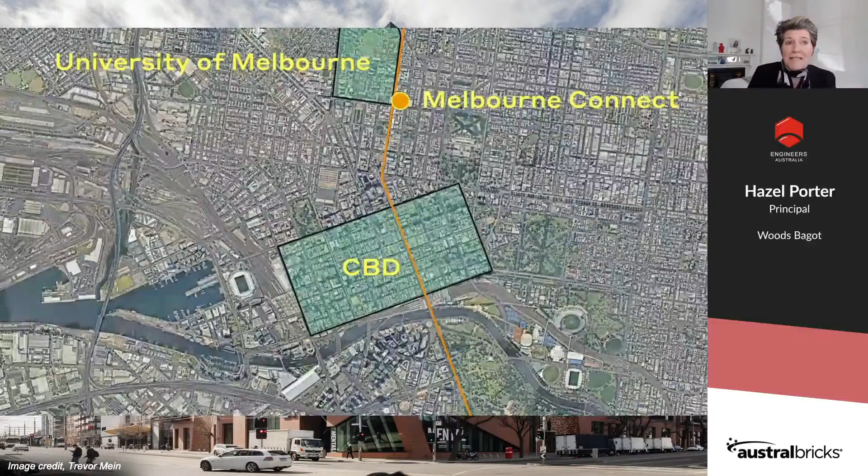To tell you a little about the background and genesis of the idea and how we constructed this place, it's one of the only innovation precincts in the whole of Australia. It sits just off campus, just outside the CBD, near the University of Melbourne, one of a small cluster of buildings sitting in the suburb of Carlton.

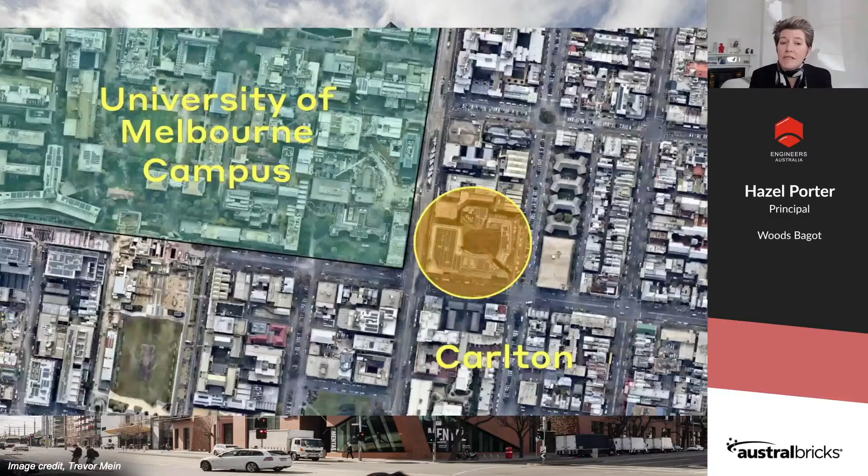As I mentioned, it's just off the traditional campus, and it's a site that's had a pretty robust dialogue with the surrounding context. It had a particular scale that was quite unique in Carlton, and it's a site with an incredibly complex history. Since 1856, it's been a site of ongoing dedication to women's health and innovation in women's health, both in science and wellbeing—a place of continuous learning with a lot of groundbreaking research happening here.

From the outset, the key design principles we set for ourselves included the intent to deliver a really high quality built form that connects key land uses with great amenity. We resolved a built form that reflects the strategic importance of the precinct, with clear, demonstrated innovative precinct-wide ESD initiatives. We also wanted to create an enhanced public realm and open space which all of the program could connect to, taking cues from places like the old quad on campus at the university, so that connection back to the institution as a place of knowledge was still recognisable.

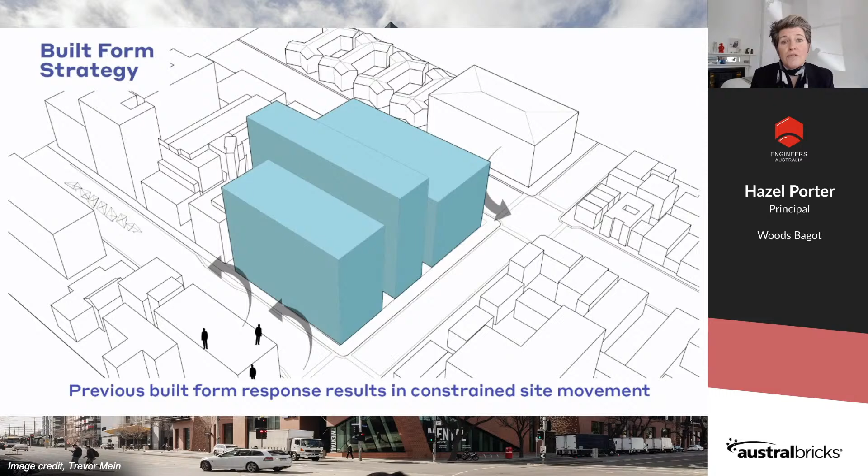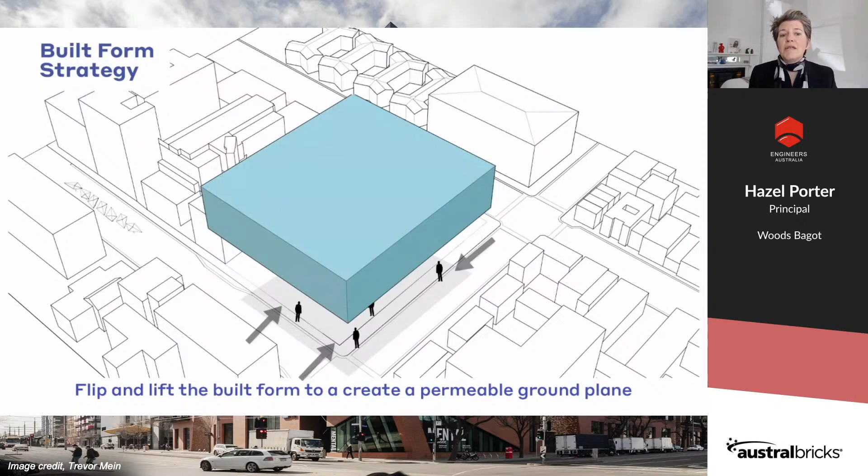When we went through and approached the built form and investigated retaining the existing hospital buildings and adaptively repurposing them, it became pretty clear that this wouldn't facilitate any of the intentions of the brief and the aspirations the university had. So we conceptually flipped the program 90 degrees and lifted it above ground, which allowed the site to be accessible and created a space in the centre of the site—both ceremonial and practical. This approach became the foundation from which we designed a universally accessible ground plane.

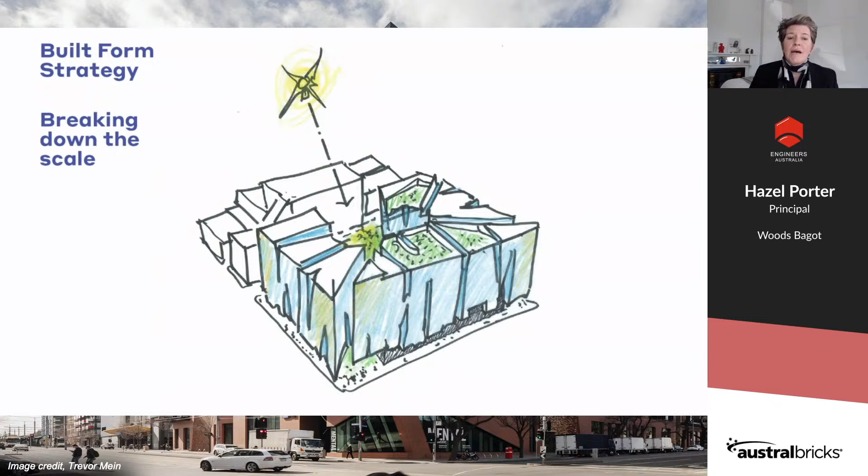We also had around 4 metres of height difference through the site to mitigate, and that allowed us to push the built form and program to the street edges—quite challenging given a whole series of planning setbacks we had to challenge. But we were convinced this was the right approach to create that gathering space within.

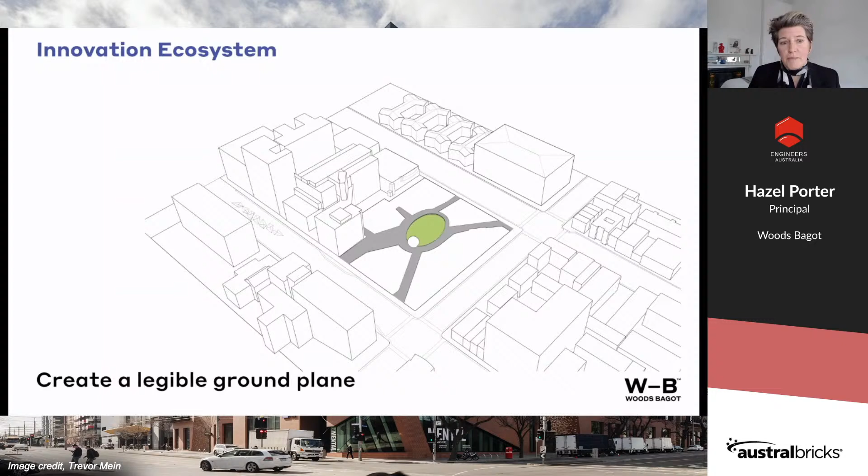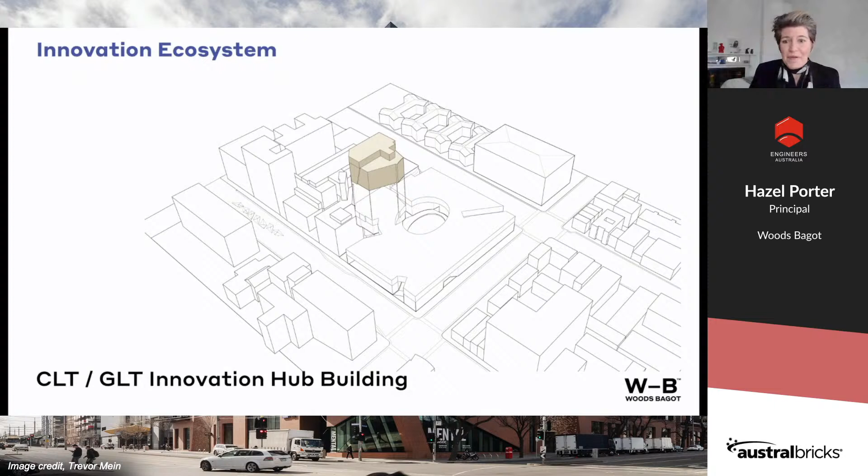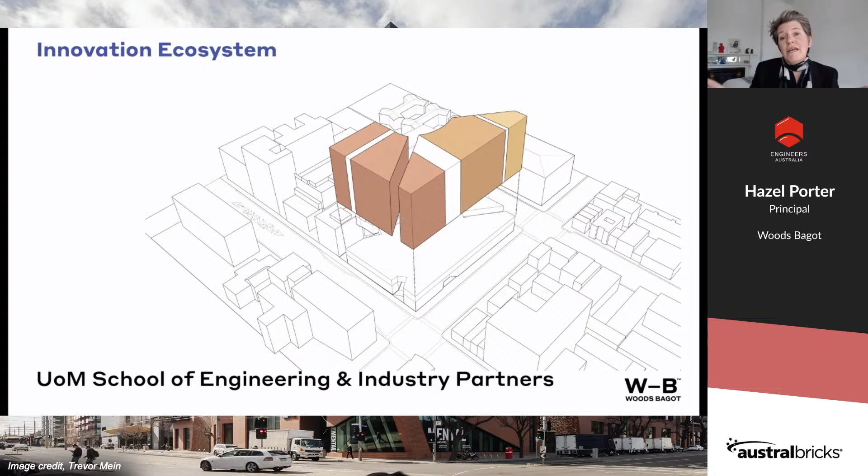When we run through the build-up of the project, the program stack and the way we orchestrated and organised everything around this central open space becomes quite clear. We have the ground plane, and the connected superfloor that hovers above and sets the geometry to organise all of the other buildings. There's the small timber frame building—and I say small, it's not actually that small, it's 6 storeys—with the residential accommodation that Hayball collaborated with us on. We've got the School of Engineering and all of the industry partners within 2 connected wings of the building. Overall, the massing plays out to make this connected ecosystem of innovation.

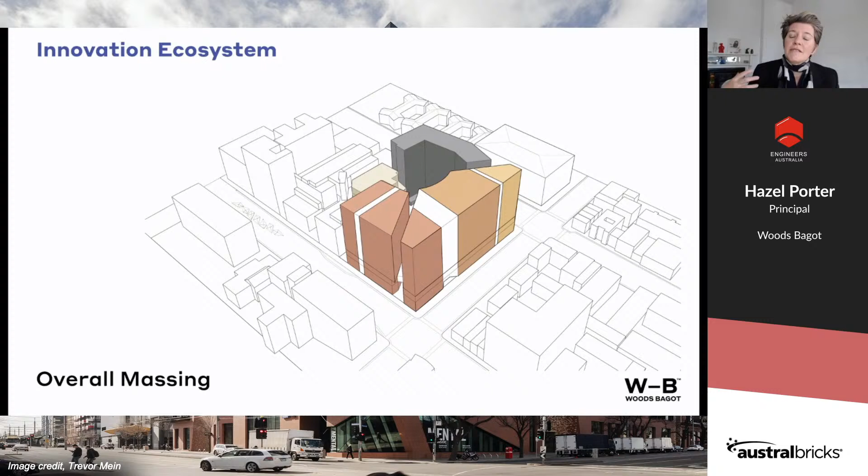The articulation of the massing then became all about how we break that up in the city skyline, while being cognizant that it needed to relate to people at a scale at the street. So as a statement of intent at the gateway of the Parkville campus to the University of Melbourne, the external articulation of the building is deliberately broken down into discernible components, where the space between each piece signifies either an entrance to one of the buildings or a laneway connection through and into the site.

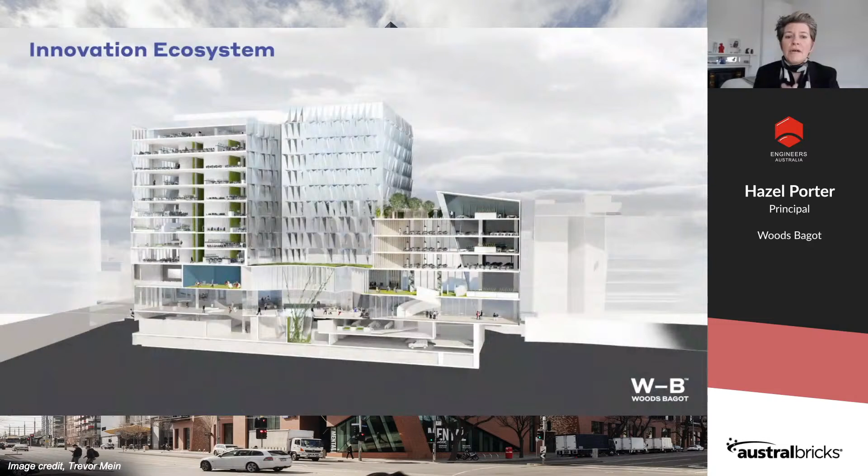When we slice that building open, we can unveil the complexity of program within, and you can start to see the connectivity right through from the lower subterranean levels up through to the inhabited rooftops and green roofs. And when we look at the detail of the ground plan, those connections are even more legible.

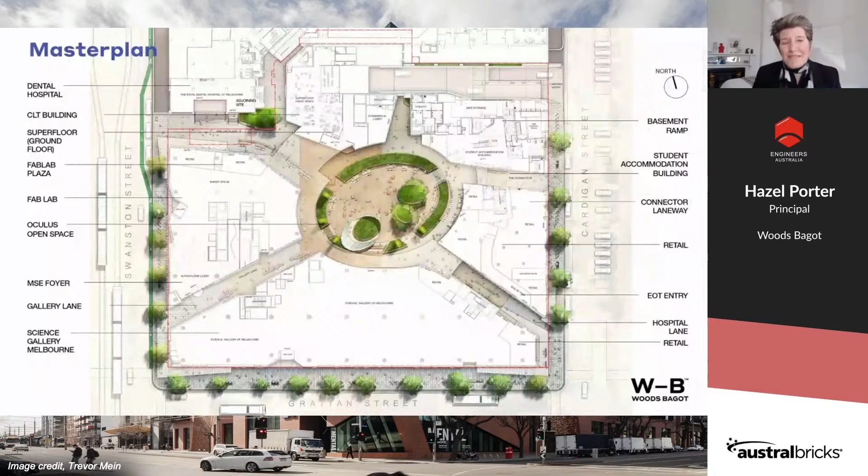The central theme of organising open space is really to bring people together and give them a place that's connected to all the buildings, inherently part of the university and also Carlton. This is a publicly accessible 24/7 area and space, and it is incredibly welcoming.

That's to emulate the conversation around innovation as a collaborative process. With Aspect Studios, we've used timber and bricks in the ground plane and native planting in an effort to create a really robust, inviting place. It's great to work outside with seating, tables, Wi-Fi, and events coming up eventually when we're allowed to be back there in person.

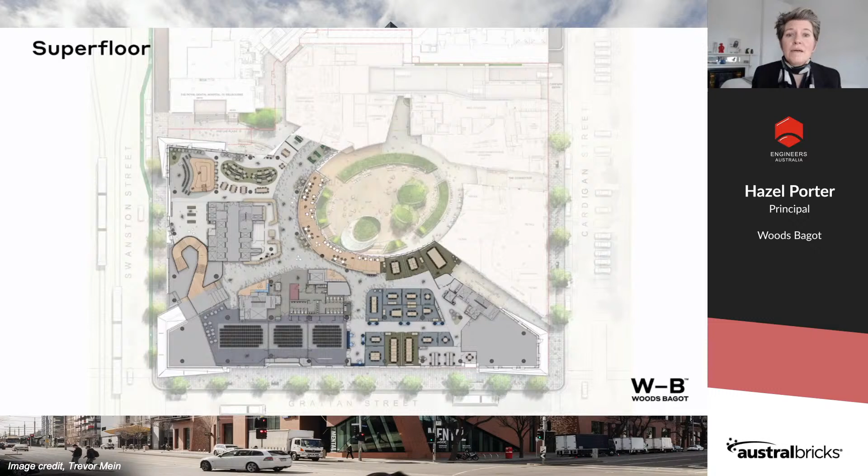So the superfloor is that invited space. It's open to everybody who works in the building and who lives on this particular site. It's a little bit like a hyper library where everything's connected, with a whole series of different types of spaces.

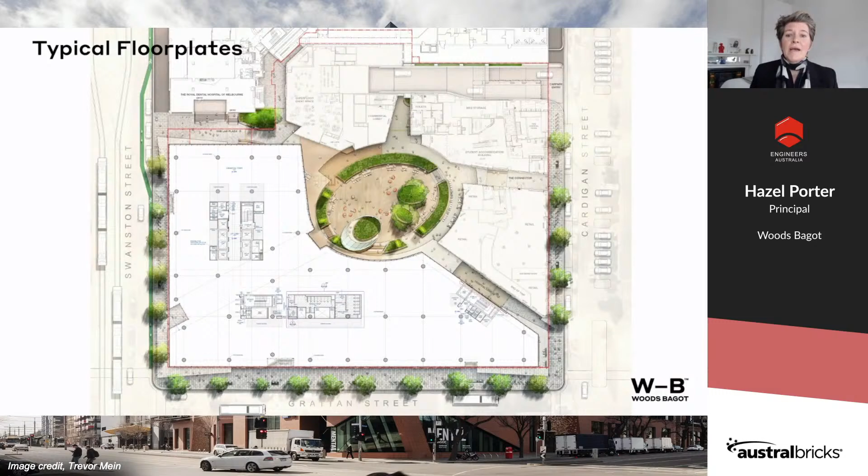Moving up into the typical floor plates, the main building is split into two with two different cores. As you can see, we've got a lot of facade area, so we'll get into what that actually means for tackling that design problem. With that understanding of the context of the university campus and the urban grain of Carlton, we really looked to connect those two conditions, bringing it through the site and quite literally connecting everything.

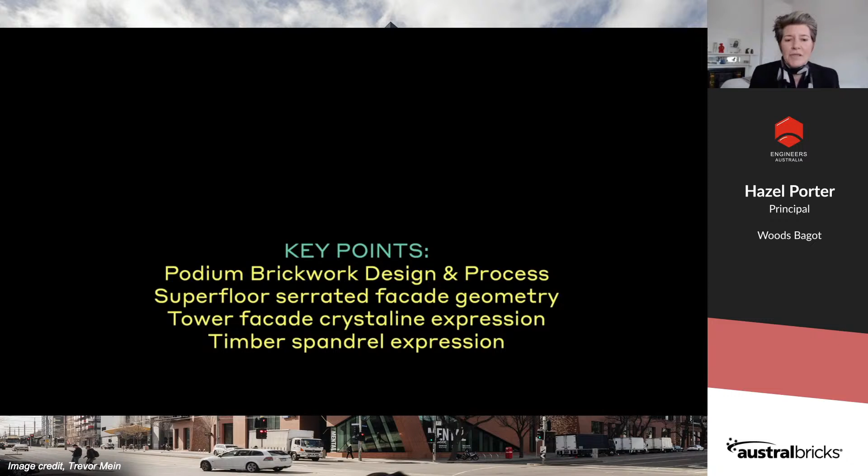When we worked with Arup on the facade types, we had four key areas: the podium, the superfloor serrated facade geometry, which is a really important organising feature of the whole precinct, the facade of the tower, and the timber frame building. The ones I'd like to talk about today are the brickwork and the tower facades.

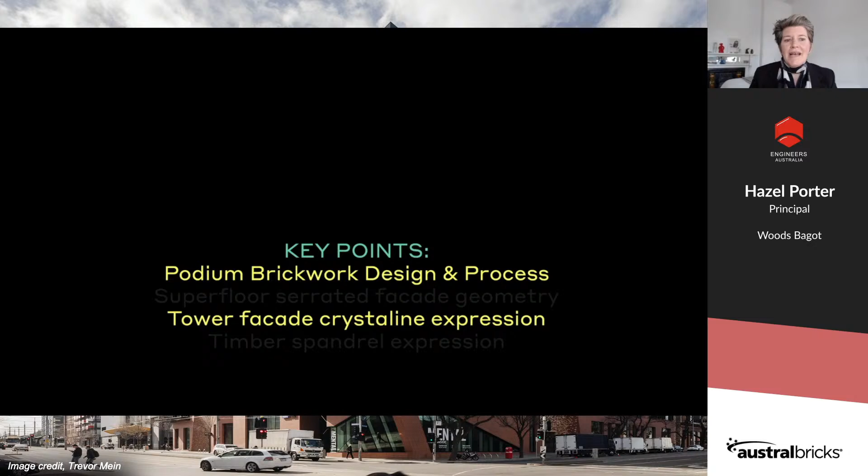Mainly talking about the collaborative nature of spaces, we might ask how we actually reassess what's going on in the public realm at a moment when we're not physically as connected as we'd like to be. What we like to do is talk about how we've approached the design of the facades to, in future, hopefully facilitate as much collaborative work on site as possible.

So we've come full circle, and what we wanted to do was connect what's going on outside to the inside. We've really looked at a whole series of relevant materials in and around Carlton, and one that stands out is the brickwork.

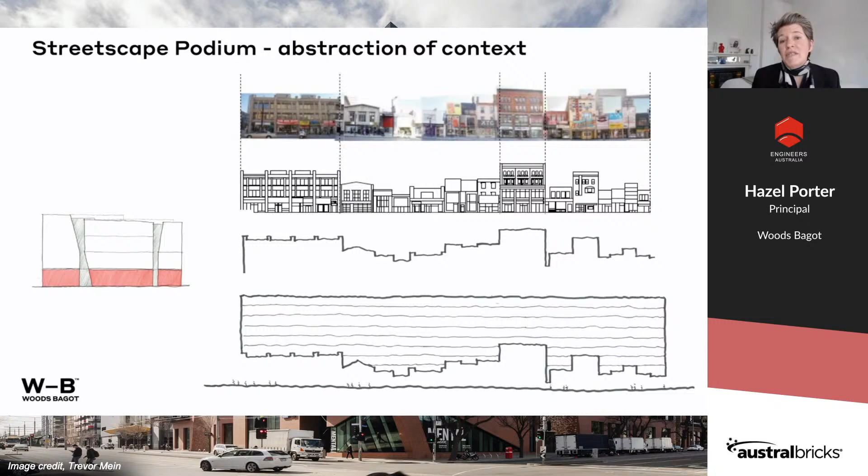In the podium, the materiality and scale that's really predominant in these streetscapes has inspired us. We abstracted that scale and rhythm and created a human connection and scale at the interface, which is then saturated with the minutiae of brick detailing.

When we play that out throughout the buildings and the connected nature of the city block it sits in, we start to carve out the underside of the podium with the silhouette of the street. The ability to pull those two things away is really where we put the superfloor, so that it becomes a connecting feature.

We deliberately aimed to make the street-facing windows of the creator spaces, the science gallery, and the superfloor have slightly more domestic overtones than you might expect in a building of this size. We did that to indicate the spaces are quite familiar and accessible — you can sit there and peek through the windows to see what's happening.

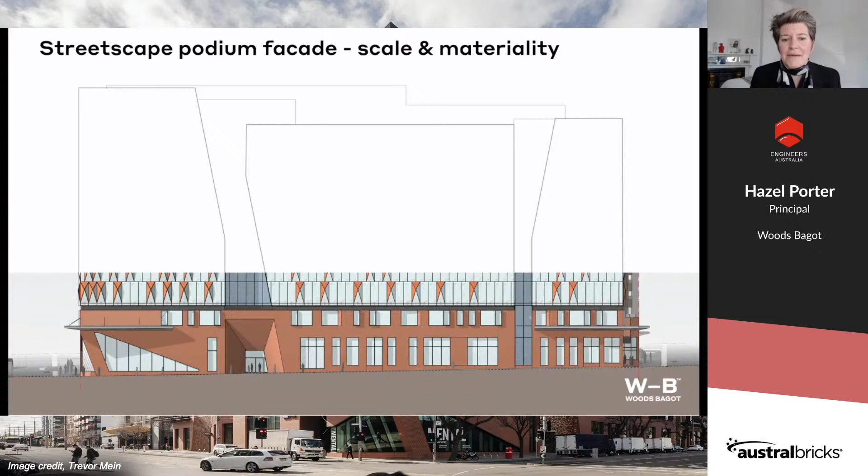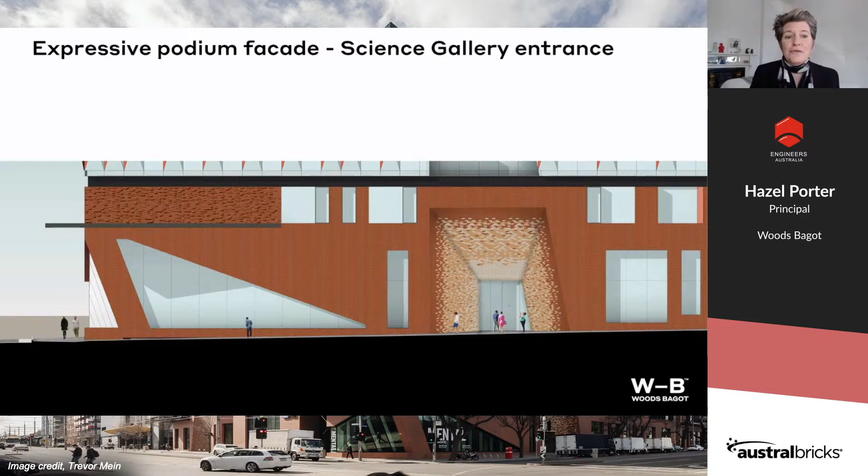Where there's something really going on, like a display in the Science Gallery Western exhibition space, we made the windows really big and gave people spaces to sit and look through to see what's going on. In Swanston Street, we've used the brickwork podium and a massive brick portal to celebrate the entrance to the maker spaces and the fabrication laboratory.

We used a mix of the university grey bricks and the red bricks of Chapel Red, Burwood Blue, and replicated the previous brickwork from the old hospital. With that mix and pixelation, we really looked to play up the idea of entrance, and we get these beautiful unexpected moments of shadow play, really celebrating life on the street.

To unpack how we actually made all of this work — understanding and working with traditional brickwork, we really had to turn it on its head and figure out how to span all of these giant openings.

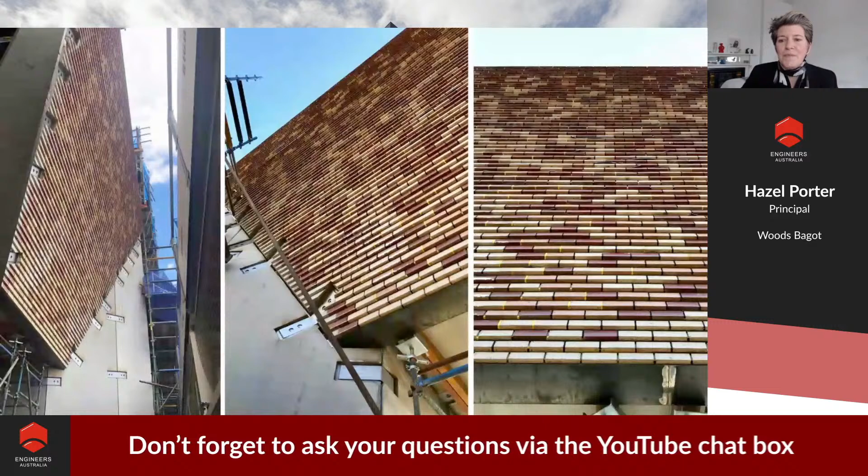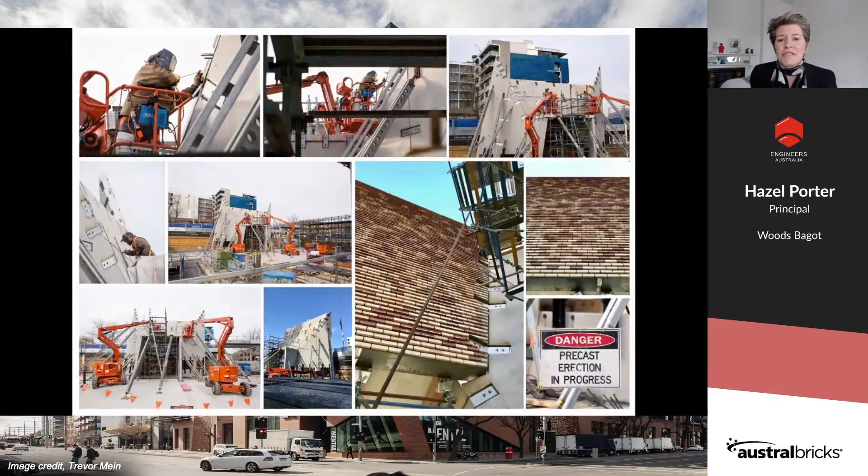So we ended up doing a series of prototyping with Arup, Lend-Lease, the Brickyard, and Burn Construction, with amazingly rich dialogue about how to solve this issue. The precast portals themselves are incredibly spectacular, quite oversized, and the scale of them and their installation made the construction an absolutely fascinating process. I'll play you a video now to take you through that.

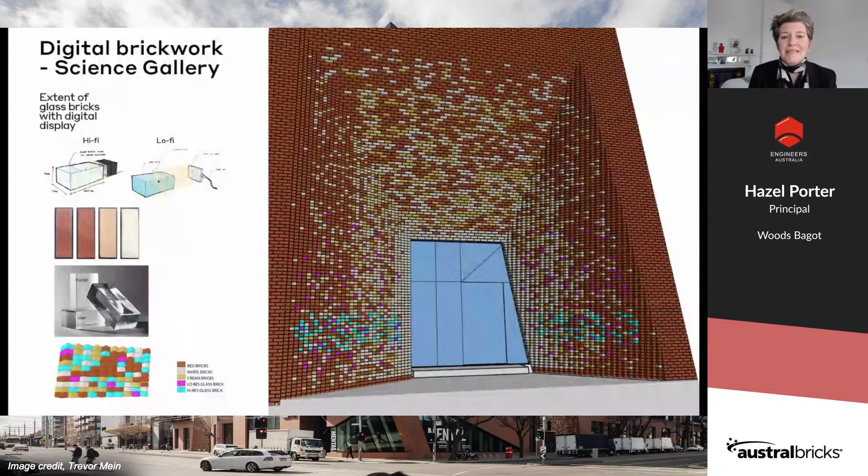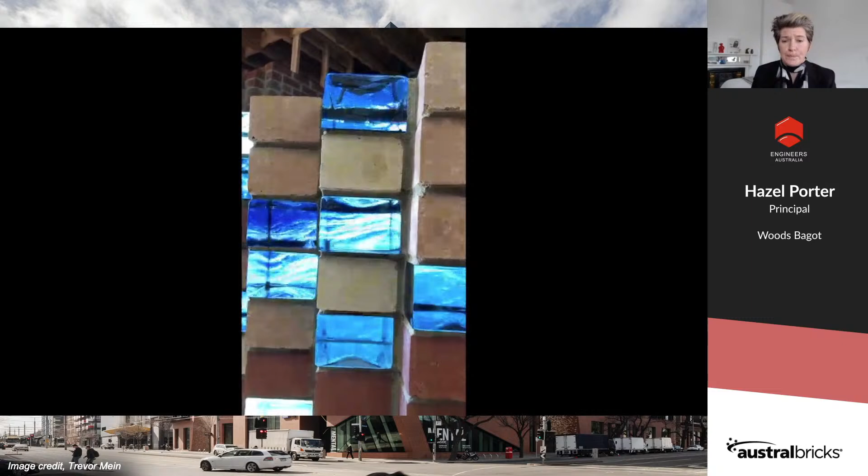We modelled up each and every one of the bricks in the virtual world, and did some 3D printing to test it all out. We then took that through documentation to make a prototype out in the brickyard. This is a short video looking at the different screens we had to choose from, the resolution up close, some of the mortar options we were looking at, some backgrounds, and whether we turn the fog up or down - a really fascinating process.

And the outcome has been incredibly spectacular, very successful. It just won a digital media in architecture award, and I invite you all to go down there and see it on your 5-kilometre walk at the moment.

There are 226 of these glass bricks, and the team came up with 'If These Walls Could Talk.' As I said, it's now a curated art piece, and the Science Gallery have really embraced this. My understanding is they're developing technology in the next couple of months to make the screens interactive with the upcoming exhibition. So they're curated, and the themes are all related to the Science Gallery.

That cross-disciplinary mix of science and art is really the important message, I guess, of what's happening here as well, given that we can inject the art into the architecture and the engineering.

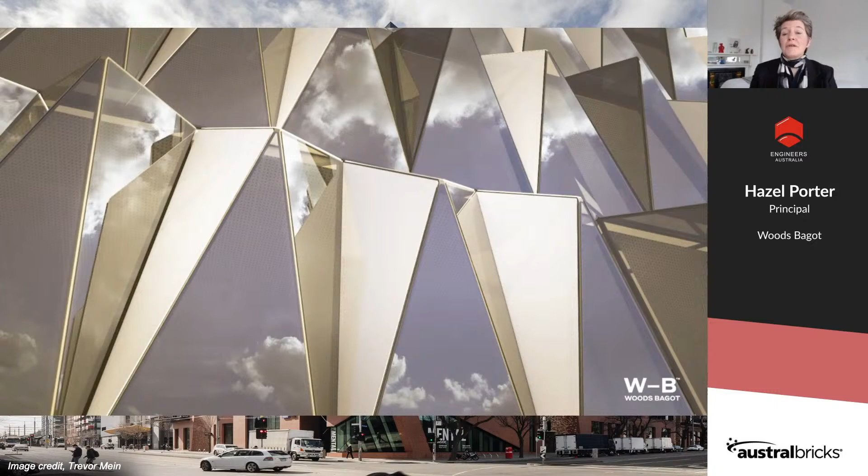With a lot of the collaborative focus being on the lower levels of the precinct, the upper levels of the tower above are a bit more expressive of the sustainability aspirations for Melbourne Connect and for the precinct itself, and also for the research being undertaken within its walls.

As I mentioned, there are a number of different initiatives that were targeted and have been achieved, and along with the Arup ESD team - Richard, Chris, and the rest of the team there - a lot of these initiatives were not just for design, they're actually being delivered as built.

One of the initiatives you can see is the connection through the site, but also the fact that we've got PV cells populating the roofs as far as we could possibly manage. And the facades are also a really key part of the integrated approach that we took.

One of the briefing components was for 10% of all energy on site to be generated by renewables actually on site. So the PV cells play one part, and there's some geothermal through some of the soldier piles in the basements. But a really important and large part of achieving that has been the approach we took to the facade design.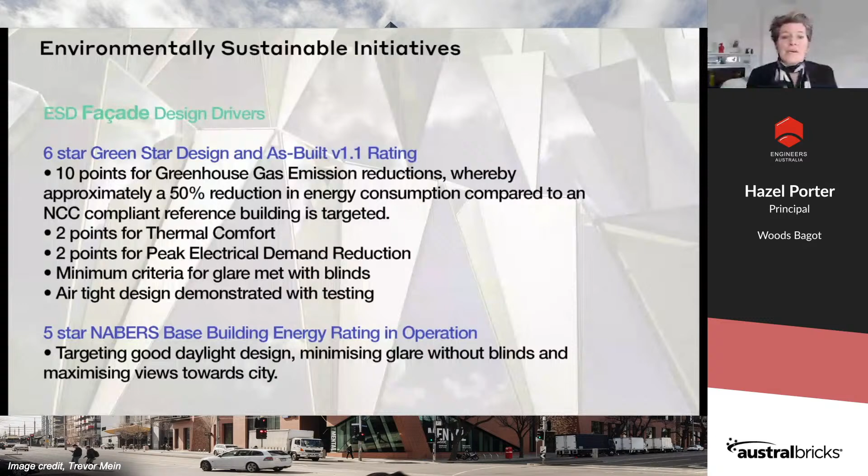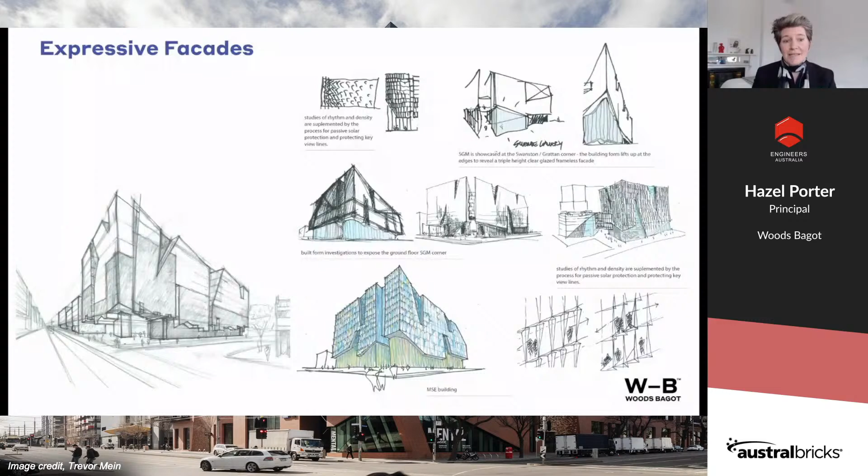So we wanted a really clear agenda to reduce the amount of energy being absorbed through the glass, and to make the facade as expressive as possible of that intent, looking at a number of different ways of doing that. We achieved it by creating a series of three-dimensional triangulated sun shading hoods, and we also brought in a similar geometric prism panel made of glass. The results are really expressive, but it's entirely passive, a design for the facade that's sensitive to orientation.

As I mentioned previously, the buildings are 360 degrees, and the cores are all absorbed within this beautiful facade. So we limited the solar exposure while considering the really complex spatial demands within the buildings. The master plan pushes all of the program and built fabric to the site perimeter, and that internal geometry is mostly facing north, so we had a series of north-facing solar challenges to overcome.

What we devised, again with the Arup team, and this actually arrived quite early in the design competition process, was to tailor each one of these sun shading hoods and the glass prisms to suit its specific location and orientation on all of the facades on all of the buildings. The sun shading hoods do the lion's share of the work on the north and west facades, and the glass prisms are mixed into the west facade, creating a vibrant pattern of colour and relief that provides self-shading and helps us achieve that 50% energy reduction.

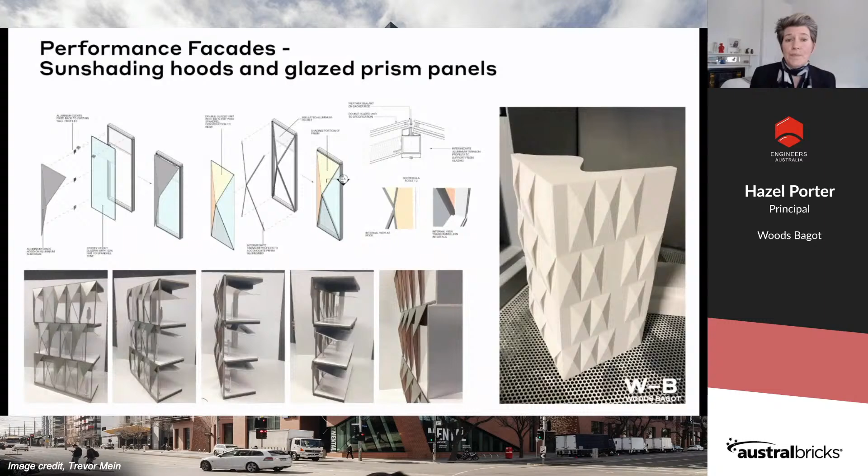We investigated a series of different ways of looking at that mix, where the nodes are, how many sun shading hoods and how many prisms we have, coupling that with the context, proximities of other buildings, but also really importantly the views out from the floor plates, coupled with the solar loading and where that was most needed.

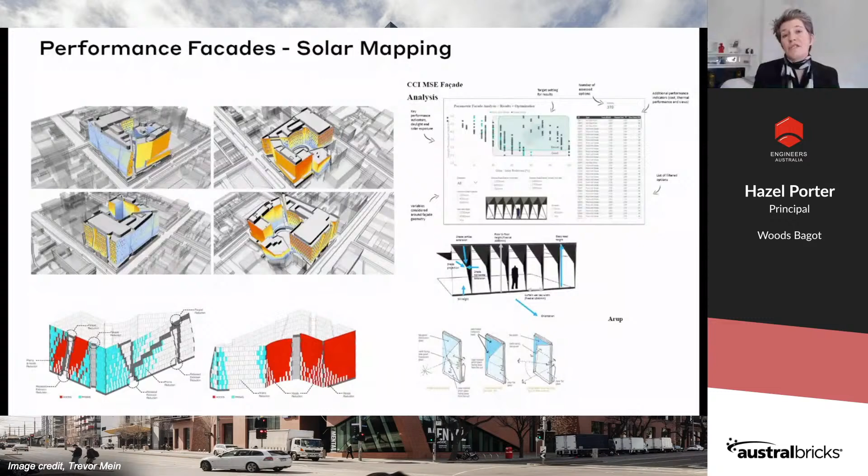So with the team, our team and the Arup team, we looked at the best application of our environmental knowledge and the tools we had at our beck and call, but also developed ones that we didn't have. There were scripts imagined and written for all of the panel types. We assessed a lot of things to address our brief, which were daylight, views, and the program within.

Then Arup would analyse and optimise the panel locations, and through the construction process, we would collectively work through optimizing all of the quantities, the panel types, the node locations, and their locations.

So it's a truly unique internal experience for the floor plates. The depth of the prism panels is about 450 mil, and that lean-out moment is really quite something.

Just going around the building, this is the east-facing corner of Cardigan and Grattan Street, and you can start to see some of those colours. The base starts with a red to match the brickwork, and then we release that up, becoming lighter every two floors, through to a very light ochre colour, with the champagne colour of the sun shading hoods on the outside being consistent, and we pick up the coloration on the inside of the sun shading hoods. So it's an incredibly rich expression of performance-generated facade design.

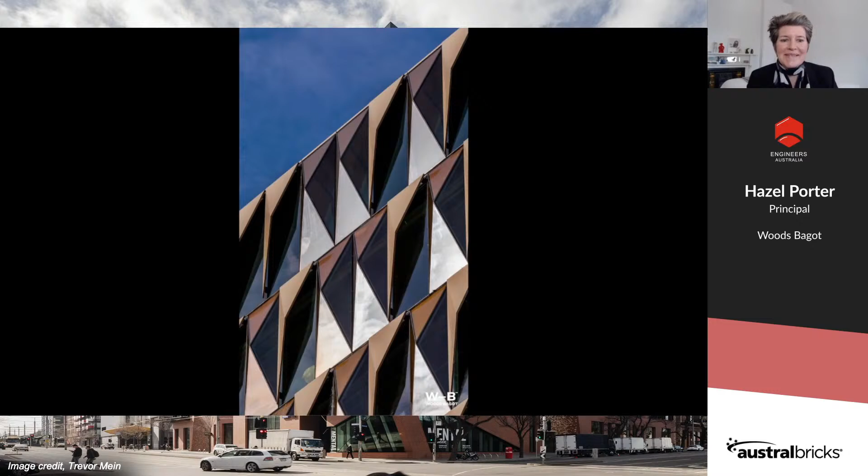With that cross-pollination of program and disciplines within Melbourne Connect, we really wanted to make sure that what we were putting forward into Carlton, into the university, was as expressive as it could be, with that excitement and energy reflected on the facades of what's happening inside the buildings themselves. So the mass, the colour, the texture, and the materiality changes across the facades.

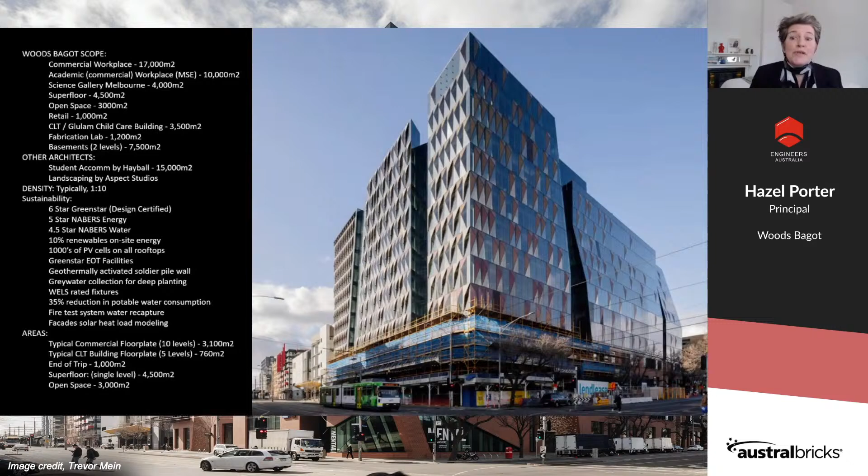It's really exciting for us to think about this place as a new connecting and collaborative precinct in Melbourne. There are a few line notes here just about the building, and we can talk about those a little bit further with Tim, but I'll just leave you with this short video.

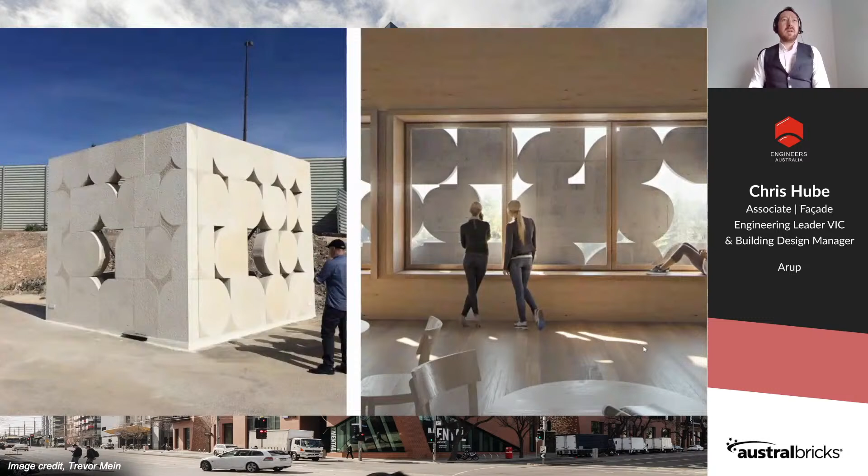Some have different appearances from two different perspectives, as the bystander walking by the building, or the user inside. Some we look at from new materials altogether, or materials that have a greater longevity, that must stand the test of time but be moldable to a particular shape. Or older materials that we're trying to do something new with.

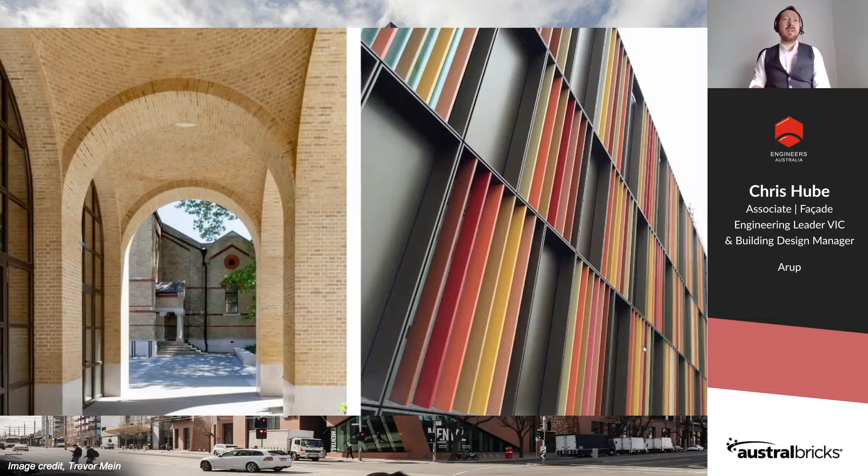In some cases we look at all the modern techniques to achieve color or form, but in some cases modern facades actually employ traditional techniques, like load-bearing masonry, a vocation that's almost lost in some industries.

But facades aren't new. Curtain walls aren't new. They've been around since the 1950s and earlier. But what I think is really important is that when we approach best practice and innovation, it's always a reminder that facade engineering isn't just a discipline. It's a culmination of all disciplines, and many of them, and requires a really conscious decision to want to work together.

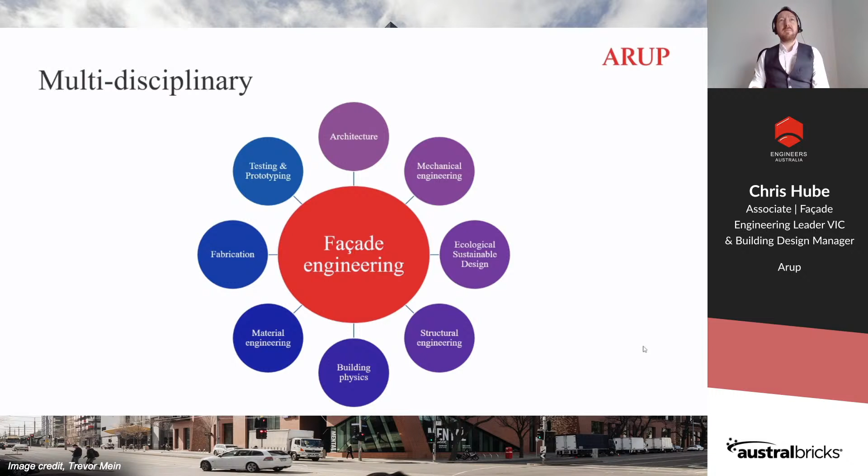And I'm always reminded, and I think it's a good thing, that we go back to what is the base route we're trying to look at. At Arup, we have the concept of total architecture. The premise is that, from a single discipline perspective, it's not always as simple as just jumping in and answering that question on how to enclose a building to separate the outside from inside. There's a holistic approach we need to employ to make sure we get the right answer or the right solution, and we need to work together to get to that outcome.

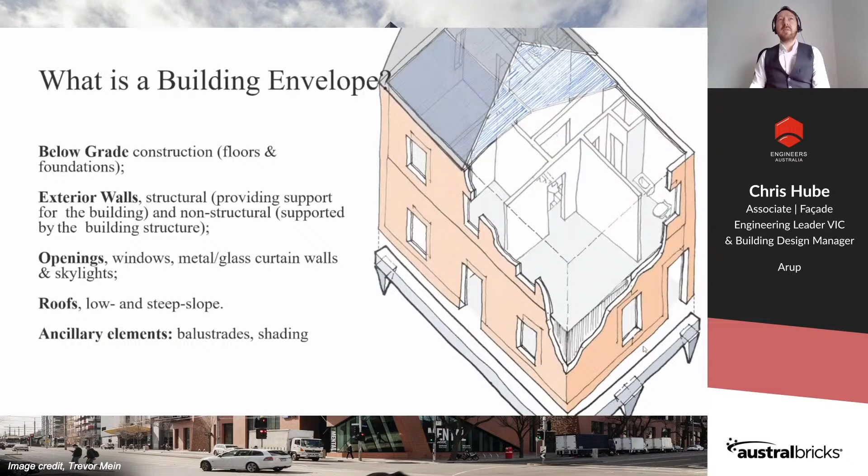So last year I presented on what the building envelope is, and I think it's really important that a facade is just a component of it, or the vertical component of a building, isn't the only aspect that creates the enclosure. We need to think with the building envelope in mind, and those building envelope drivers are almost endless to an extent. There are so many things influencing the key decisions we make.

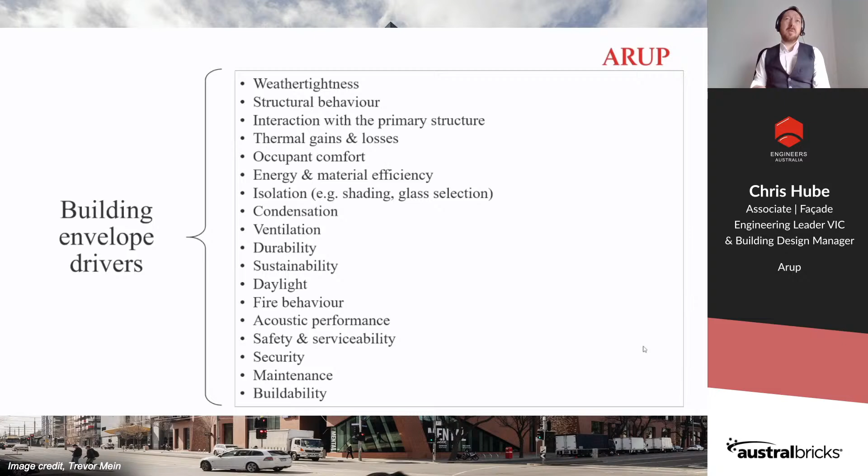But where did we start on Melbourne Connect? Hazel's done a great introduction and showed the experience that her and her team has gone through, and that we worked with her on. We had to look at the precinct and the building as a whole and how it worked together, and so we had to start with a commitment. We had to together agree that we had to focus on what was best for the project.

It had to be a collaboration between ourselves, Woods Bagot, Lendlease, the university. It had to be teamwork. It wasn't going to just be myself, or myself and just a junior helping me out. This was a full team effort from all different aspects and specialisms. We had to commit to doing something special, something a bit different, and we had to agree that we wanted to do better than less bad. And when I mean less bad, I'm referring to just minimum code compliance. We had to do better than that if we're going to make an innovative precinct like the Melbourne Connect.

A starting point that is always kept fresh in mind is really focusing on what sustainable outcomes we want. The UN SDGs is a good framework for that starting point, really targeting what the project can offer and do better than just the minimum standard.

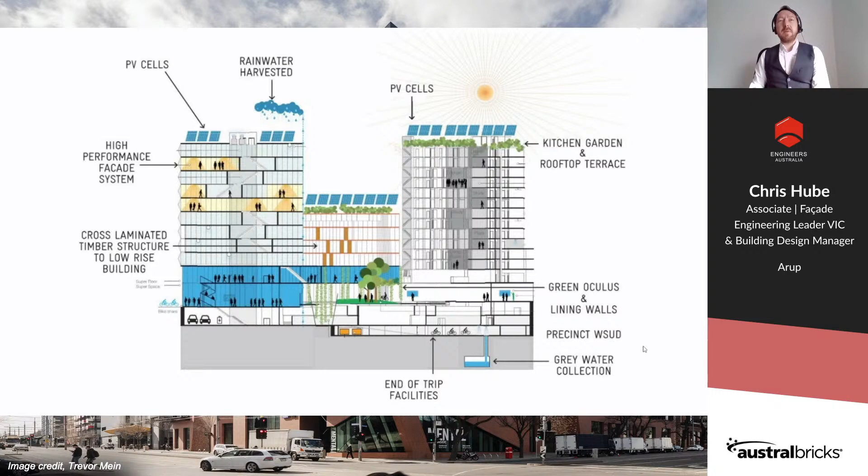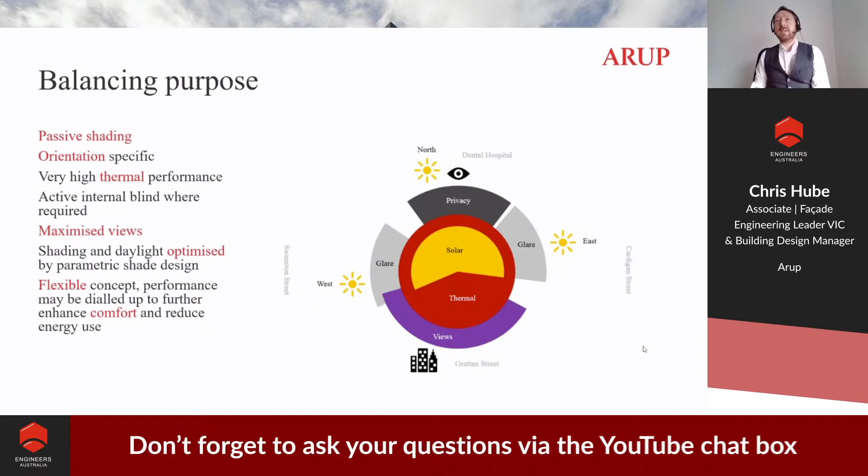Then we had to look at the site, and it had to be site-specific. I've shown this diagram before with the aspects of the site: to the north we had the dental hospital, east and west we had low-lying sun, and to the south we had beautiful views of the city. We wanted to mitigate solar heat gains so we didn't have to cool the environment as much, and make sure the envelope was very high thermal performing. We also wanted views and access to daylight, which is counter to shading, so we had to find that fine balance.

With our approach to this innovative building and facade, I had to look at an alternative technique. We used empirical data from past projects to develop a rapid digital prototyping approach, optimizing the facade and balancing different aspects. We had to consider the flexibility for the architecture to play with, ending up on a final scheme that was palatable and applied to the narrative of the building and its eventual outcomes.

We had to set some parameters. Some things were fixed - we couldn't project the sunshades out beyond a certain distance from the facade, and we had to ensure we weren't covering the whole glass with solid shading, because then there's no views. By coming with this optimized approach, we employed a simple technique to determine the minimum parameters we wanted to constrain it to.

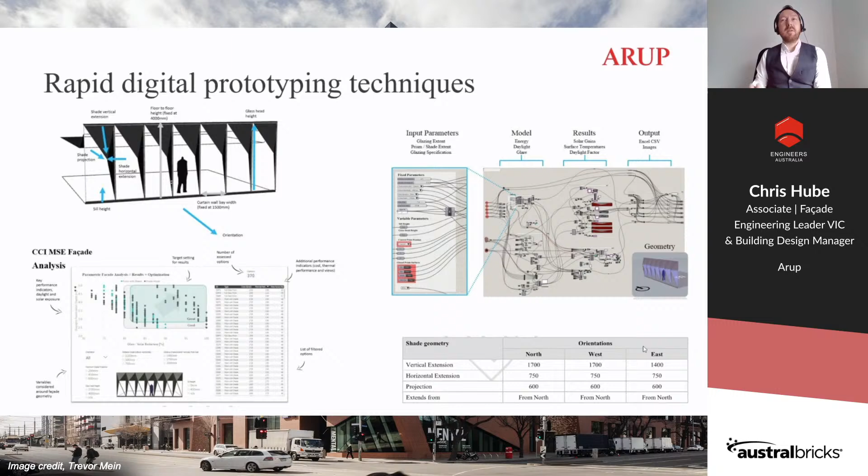Once we had the base intent, we delved into two sunshade approaches. We had a prism, shown on the left, that employed four different planes in a prism shape off of a rectilinear framing. And we had a sun hood system that was a separate attachment in front of the glass. All of this was in a relatively standardized, thermally broken curtain wall system. It was really important that we found and employed a standardized framing approach, so the building envelope connected together and could be procured and shipped from overseas or built locally with local trades - a system familiar to them without imposing too much risk.

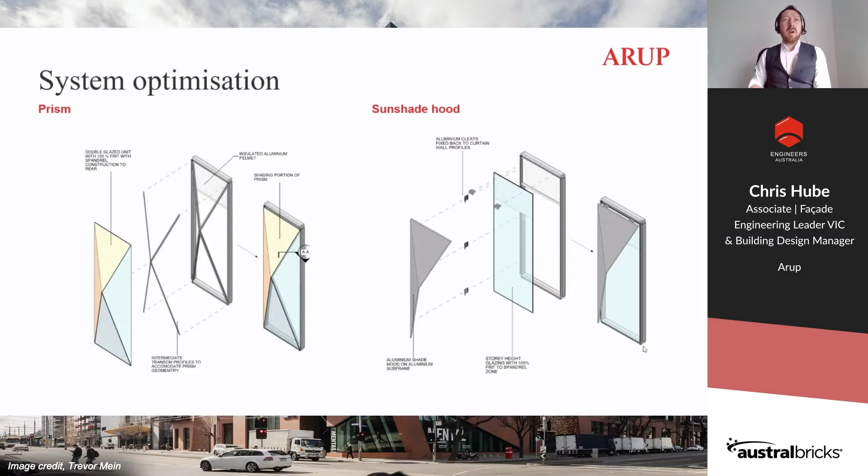Once we set those premises and rules, we were able to apply them with Woods Bagot to the different elevations. On the west elevation, you can see we have sunshades and prisms, as well as flat glass, all purposeful. The sunshades are in gray tone elements, with a bit more shading on the glass behind, and the prisms employed a bit of color to differentiate them.

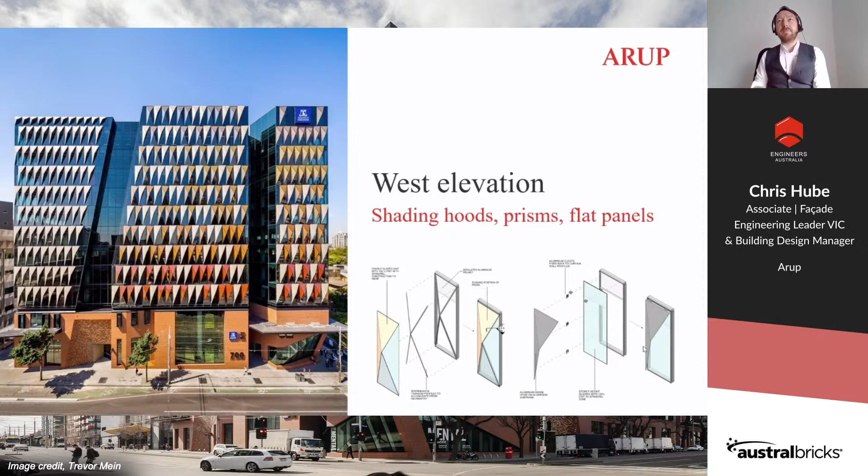On the inside of the shades, it was almost a mirror of the prisms, with the color also shown from the user or occupant's perspective as they looked out - still a reasonable amount of views and a nice amount of daylight on that floor plate, while also shading that really harsh late afternoon sun.

On the east was very similar. You can actually see that the direction of the sunshades are very different here. You have the pure east elevation on the left-hand side, and then you have this elevation that's slightly angled towards the northeast, dealing with different aspects of the sun.

You can also see just on the edge between the last set of sunshades and the golden bronzy building on the left, the student accommodation, those sunshades start to dwindle out. That was purposeful because the student accommodation actually overshadows that portion of the facade, so it wasn't necessary to employ any additional shading or solar mitigation techniques. We allowed that to be just standard glass.

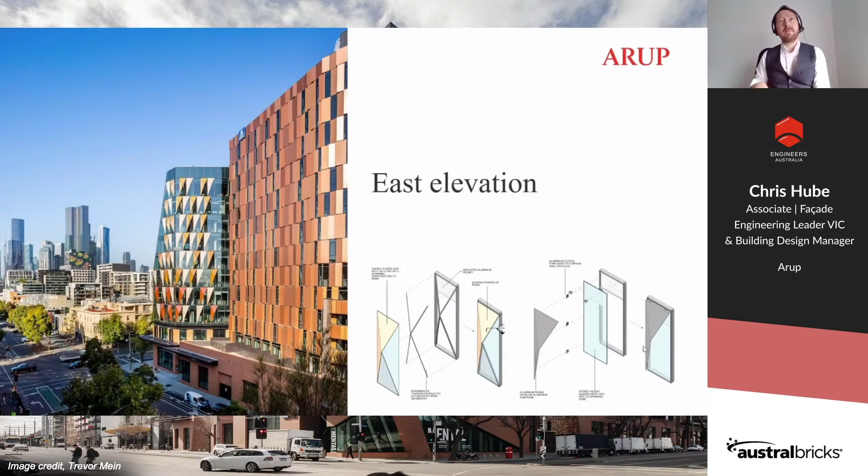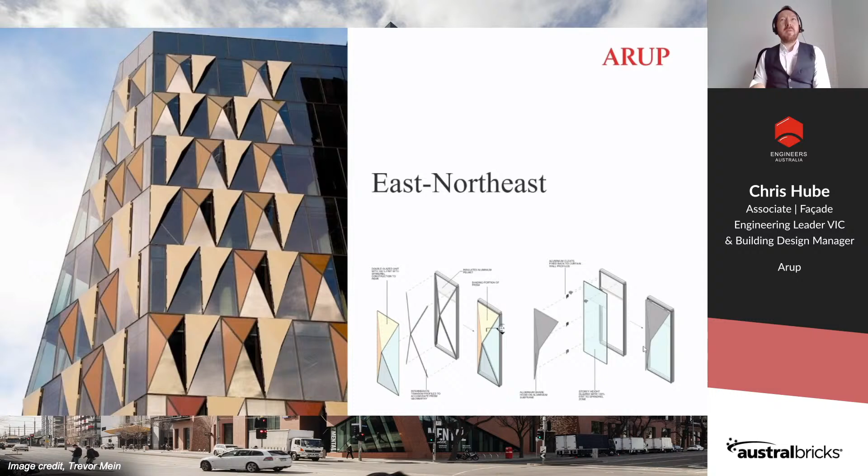You can see it here a little bit more up close, the slight differentiation between the sunshades and the prisms. The north elevation employed all sunshades, and that was a deliberate approach that Hazel and her team employed.

The critical thing with this one, as we worked through the detail design, was the curved facade. There was a little bit of concern about reflected solar glare potentially culminating into a very focused position, maybe having excess temperatures that could be harmful to the plant life in the landscaping below. So similar to the rapid prototyping idea, we used similar modeling in a slightly different approach to look at that solar radiation and reflected glare, just to optimize those sunshades a little bit more to avoid that from occurring.

As we came down the building and focused on another portion of the building envelope, we came into the brickwork on the podium. At this time, as we were a reasonable way through the design development, the university came to us with an idea.

They wanted to digitally activate the facade. Everything I've shown today, when it's built, is static - the architecture, the shading, it's all there permanently. It doesn't move, there's no interaction. And the client wanted to add an element of digital activation to it.

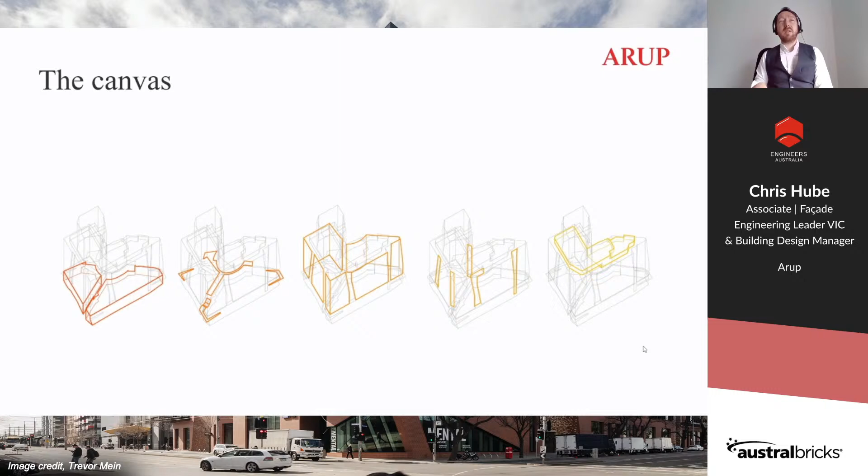Who are we connecting with? Is this a connection to the city, or are we connecting a little bit more with the people? These are all things we had to go through in multiple workshops with key stakeholders from the University of Melbourne - academics, property, operators, the developer, the builder, all the design teams from architecture to engineering - to really get to the heart of where we're going and where we want to be.

And we delved our purpose down into three aspects. We want to light a canvas, we want that to be interactive, and we want this kind of day and night juxtaposition.

We had content, and we weren't sure what that content was yet, but it had to be flexible. So content being, are we just lighting it in a digital artistic way? Are we presenting data, PhD information? Are we allowing students to develop it on their own? Are we actually showing how much renewable energy we're generating on site? That content wasn't known, but it wanted to be flexible.

If there's going to be an innovation precinct, it had to enable anything to occur in that, and there had to be an interaction. The interaction was really important because it had to show to the world, in whatever case, whether through Instagram, a person walking by, or a user, what was happening or what could be happening. It had to be able to tell a story.

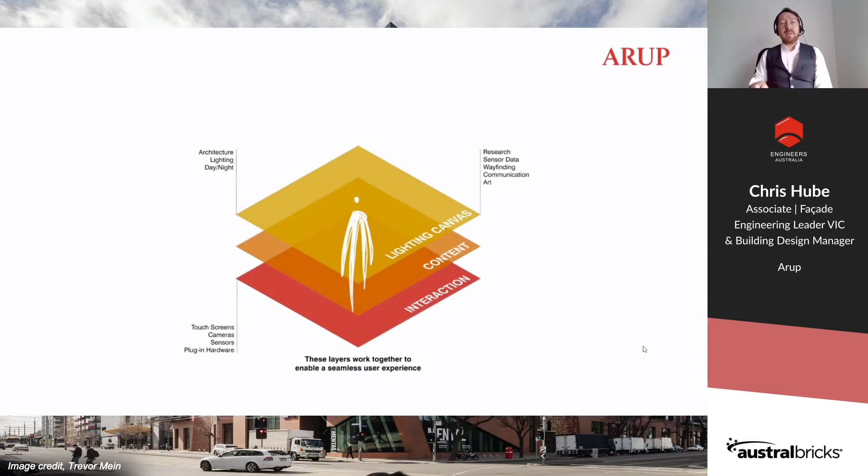So we worked through these a little more, and to actually employ this kind of innovation, we had to look at the user. If it was truly going to be something with clear purpose and be successful, the user had to be front of mind. So that interaction point was the key aspect, and then we applied it throughout.

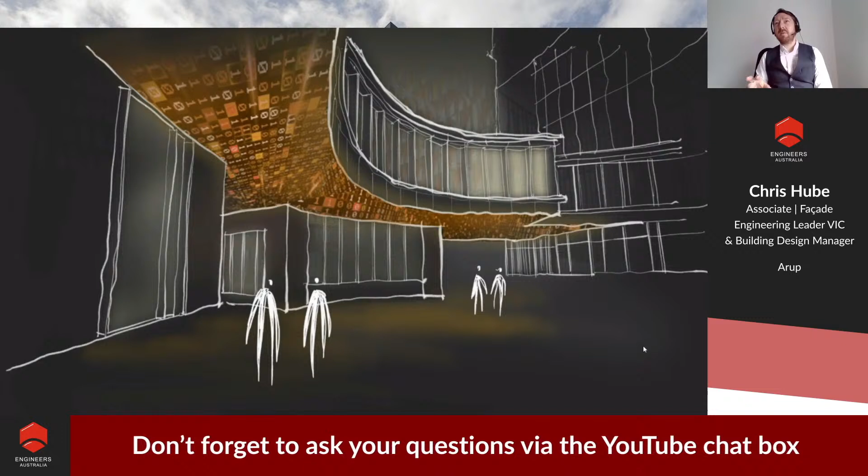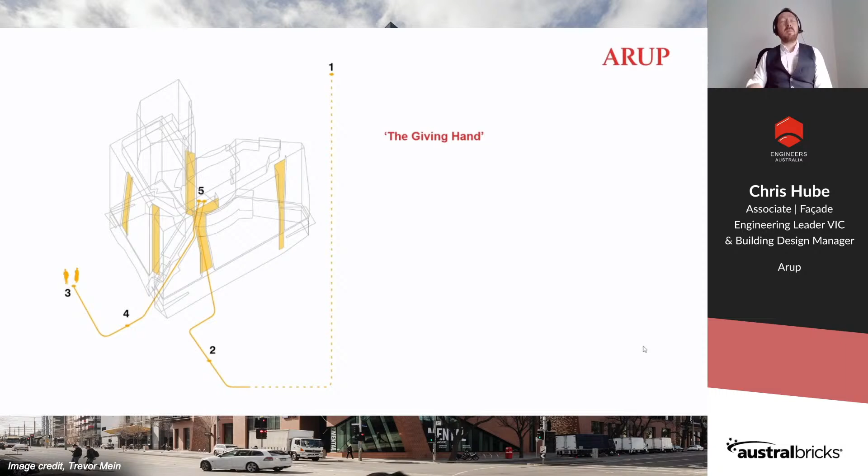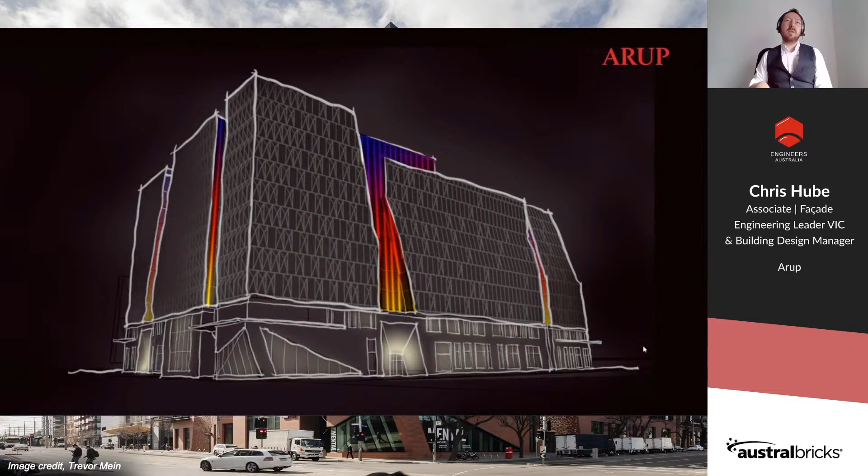So we're looking at the soffits. How do you interact with it? How does that work? What does that look like? If we do the negatives in the upper part of the building, it's a bit more outward facing, a view from afar. Is that as interactive as we want it to be? Is that just limiting it to a smaller portion of the users or passersby?

Or if we focused on the podium, not as much city facing, so it's probably not a beacon towards the city saying come look at us, come find our building, but a little bit more intimate to the people below. And actually this idea that at the ground level the building was alive. The building had something else to add. You didn't just drive by it on your bike, or walk through it to get to a class or collaboration space. You could sit there and have a moment. And that's where it came about.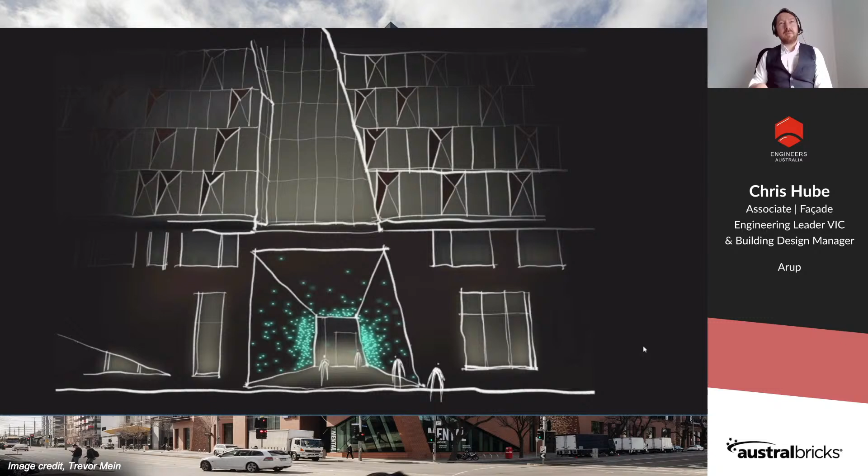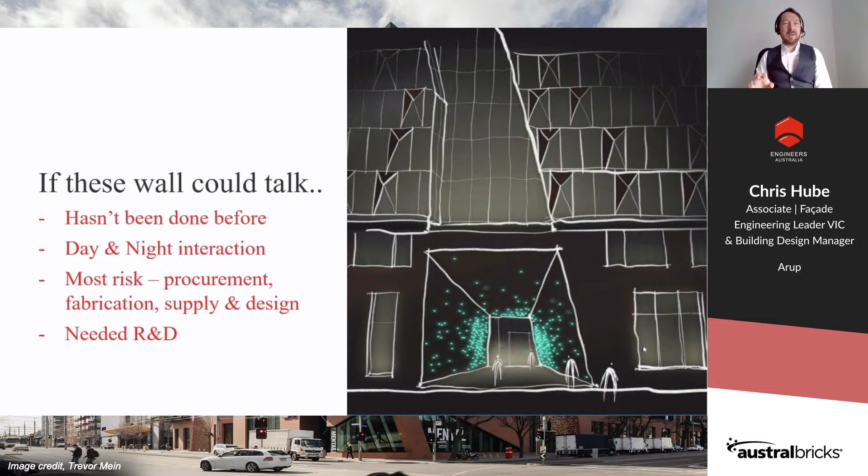But the interesting thing, after looking at all these options, is this one was probably the most innovative in the sense it hadn't been done before in this way. It had a really good day and night interaction, usable and interactive during the day, but at night as well. It had the most risk from a procurement standpoint, had never been done. Fabrication, we weren't sure how to employ it. Supply and design, we had to throw the rule book out the door and really start from square one, and it needed a lot of research and development.

The only way we could really do that, in a very similar manner to the upper facade, was to sample, test, and prototype. We had to prototype this, roll up our sleeves and get a little dirty. We're endeavoring for a digital outcome, but we had to do this physically because these materials were so different. So what we decided is, if the walls could talk, we had to look at embedding glass bricks into an existing clay brick facade or a designed facade, and illuminate them with an element.

Here we are actually playing with some of the brick samples and looking at the different colors of bricks. Some were a bit more bronze, some were clear, some were frosted, some were polished. And here we're playing with it in a boardroom with iPhones behind them, testing to see what the characteristics were like. And like all digital environments, the ultimate test was, can a cat video work on it?

How does that light transmission work? What's the image clarity? How does it look with a standard off-form glass brick versus a polished brick? Are we able to tell a story through here, and at what level? Is it a low resolution story, maybe a bit more binary, like just a bunch of lights? Or could we actually employ digital imagery in really fine detail behind these bricks as individual screens? Or could they become more, could we connect them together? These are all things we had to trial out.

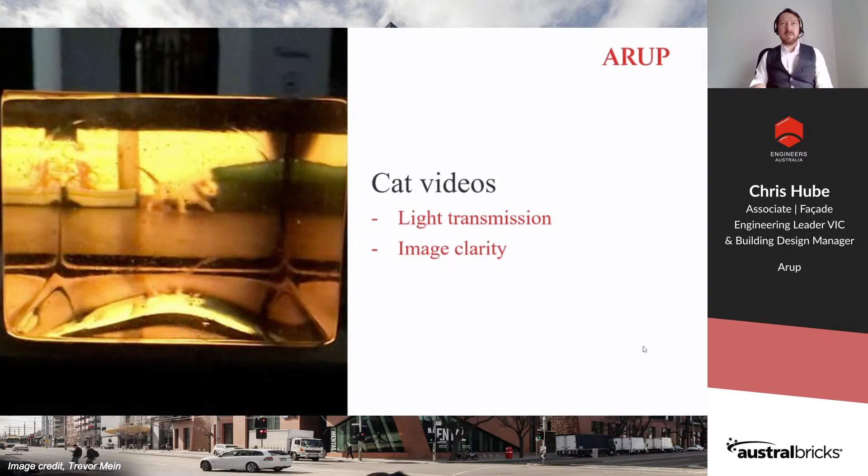We went through more physical mock-ups. How do we look at these two different materials? We have a clay-fired brick and a glass brick. One's porous, one's not, but both are really good in compression, so that's great, similar to how blockwork or masonry works. But how do they deal with things over time? Brickwork tends to grow over time with a bit of moisture exposure, because it's a porous material, it tends to grow a little bit.

Not huge amounts, but when you actually are stacking them very tall, you start to see millimeters, centimeters of movement. A glass brick doesn't really expand as much as the clay brick. So if we put these glass bricks into the facade, are they going to rip themselves apart? How do we prevent that? Where do we add them? Everywhere? Big clusters? A few little ones? These were all things we had to go through.

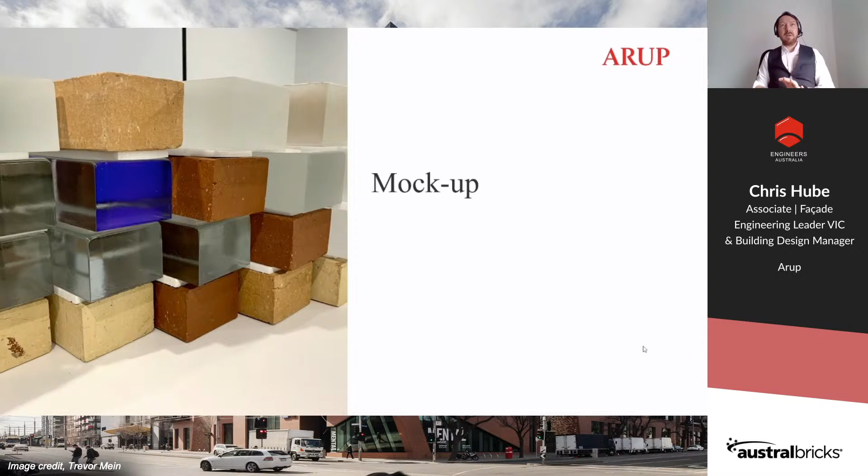The next step was we had to try to build it, employing all these thoughts of minimizing movement, putting the right minimum cluster of glass bricks that didn't have that large growth that would break apart. We had to look at what mortar holds them together—is it a traditional, harder modern mortar, or do we have to soften it to allow for those minor movements to occur?

We also had to look at the digital technology behind it. There was nothing in the market that fit, nothing with a high enough resolution that we wanted, nothing that was outdoor rated—because behind the brickwork, yes it's fairly protected from rain and weather, but it's still in a pseudo outdoor environment. So it had to be an outdoor rated system. None of these things existed before; we had to go through these step by step.

This one-to-one mock-up was really key—at this point we were deciding whether to go ahead with this or not. The glass brick suppliers were there, the brick contractor doing the podium elsewhere was there, and we worked together to figure out: do we reinforce it? How do we secure it? How do we keep it in place?

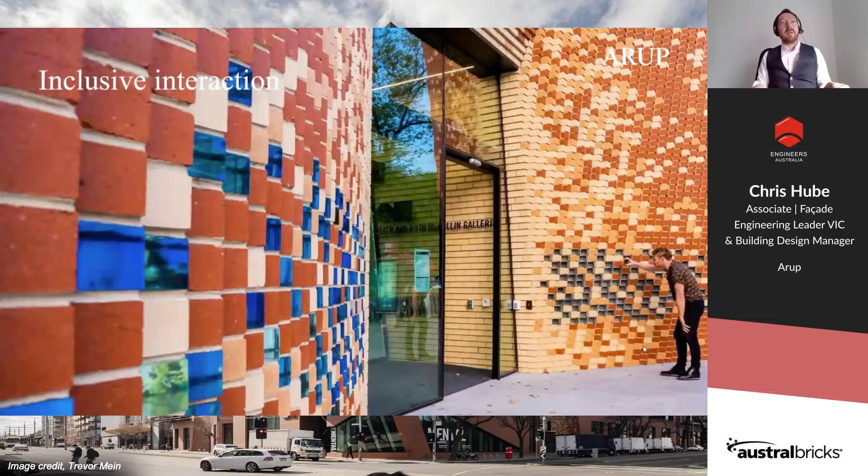The screens are inclusive. Hazel and her team worked really carefully to look at who can interact with it—is it children, people with disability, tall people, adults? All of this had to be considered. So this lower level location really employed that, and it also had to have the ability to be individual or a holistic screen.

Going back to our original commitments of collaboration and teamwork, this is just some of the team that made this thing entirely successful. Without our lighting specialists, AV specialists, facades architecture, the digital screen suppliers and fabricators, the brick specialists, and the glass supplier, we wouldn't have got this through.

We also wouldn't have gotten this through without the commitment of our client. The University of Melbourne and the Science Gallery both were on board with this—willing to go on this journey with us. By agreeing with that and laying it out, we could see the light, and this is how we got to the end.

It's just lovely to see that you have this day and night interaction, at small scale and larger scale, and you can cross the road and still see it. It's something there that, from all aspects, somebody can relate to or interact with.

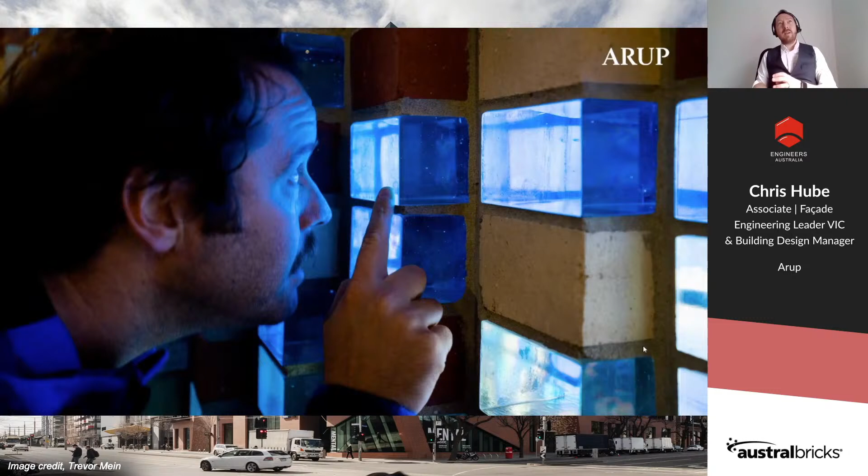This image I just love—the culmination of the taller portions of the building that we put a lot of effort into with digital prototyping, down to the actual individual nature of a single brick showing a really innovative digital approach.